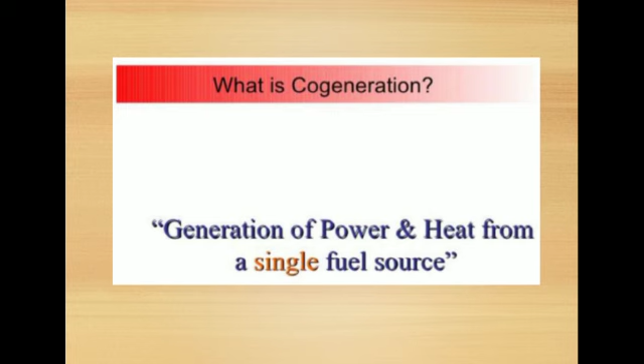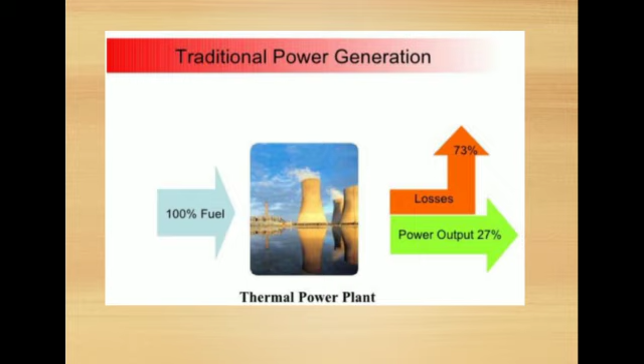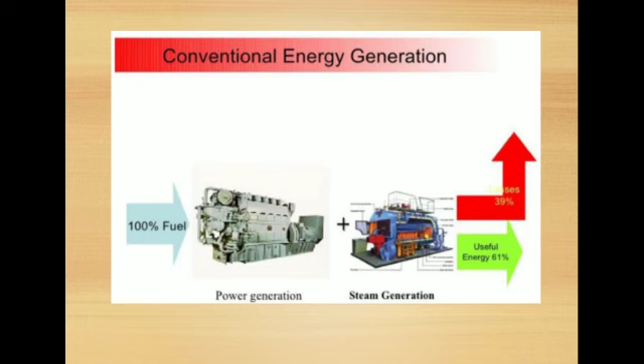Here is an example where 100% of fuel is burned. You can get the power output and some of the losses. Some losses are defined: flue gas losses, power output. The overall efficiency is greater than 75%. Captive power at low cost, fuel saving, and quality power at all times.

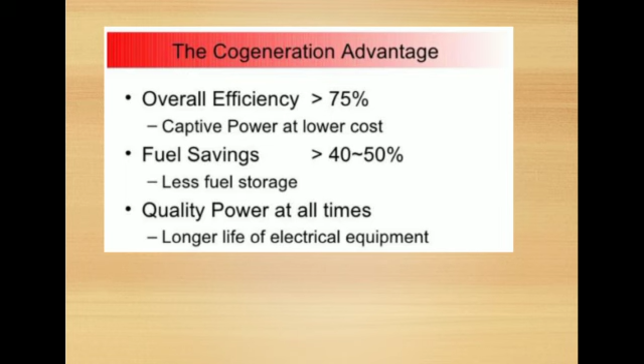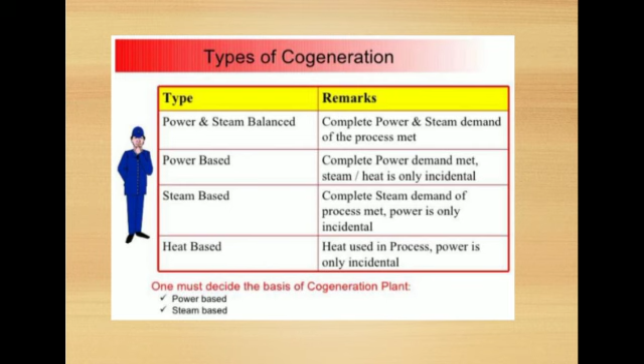Types of cogeneration. Here the power and steam balance is based on power based and steam based, heat based. One must decide the basis of the cogeneration plant, power based or steam based. Cogeneration is combined heat and power, called CHP: sequential generation of two different forms of useful energy using a single primary energy source. Most usual are electrical or mechanical, and thermal, heating or cooling.

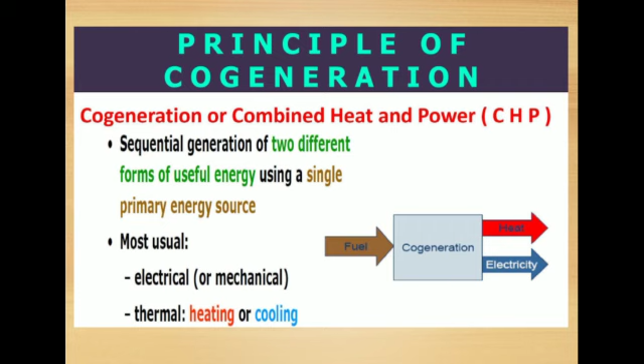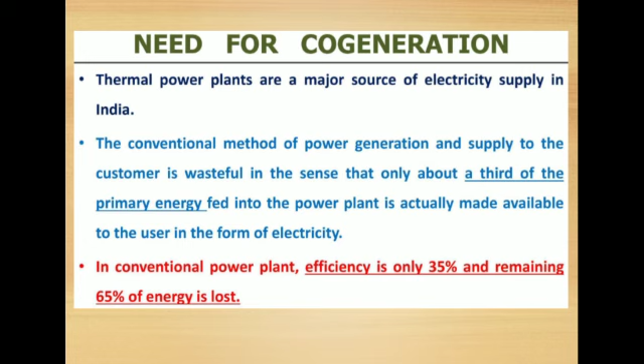Why is cogeneration needed? Thermal power plants are the major source of electricity supplied in India. The conventional method of power generation and supply to the customer is wasteful in the sense that only about a third of the primary energy fed into the power plant is actually made available to the user in the form of electricity. The conventional power plant efficiency is only 35% and the remaining 65% of energy is lost.

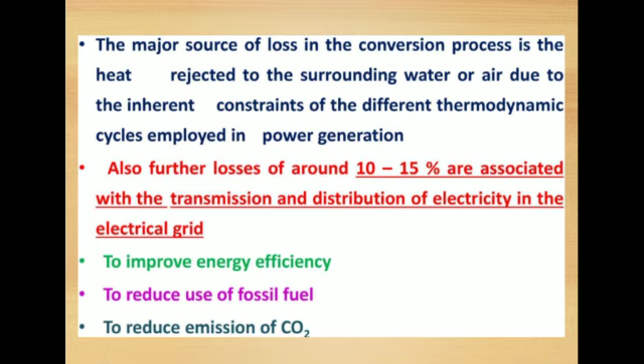Another major source of loss in the conversion process is the heat rejected to the surrounding water or air due to the inherent constraints of the different thermodynamic cycles employed in power generation. Cogeneration is used to improve energy efficiency and also reduce the use of fossil fuel. Another one is to reduce the emission of carbon dioxide.

Cogeneration system cycle. There are two types of cogeneration system cycle: first, topping cycle, second, bottoming cycle. A cogeneration system can be classified as either a topping or a bottoming cycle on the basis of the sequence of energy use. In the topping cycle, the fuel supplied is used to first produce power and then thermal energy, which is a byproduct of the cycle and is used to satisfy process heat or other thermal requirements.

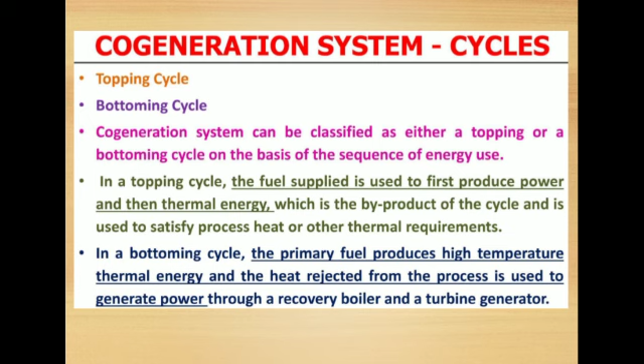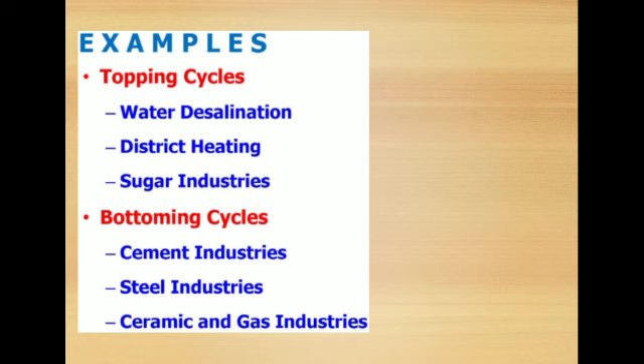In the bottoming cycle, the primary fuel produces high temperature thermal energy and the heat rejected from the process is used to generate power through a recovery boiler and a turbine generator. Examples of topping cycle: water desalination, district heating, and sugar industries. Next, bottoming cycle examples: cement industries, steel industries, ceramic and gas industries.

Types of topping cycle. A gas turbine or diesel engine producing electrical or mechanical power followed by a heat recovery boiler to create steam to drive a secondary steam turbine. This is called a combined cycle topping system. The second type of system burns fuel to produce high pressure steam that then passes through a steam turbine to produce power, with the exhaust providing low pressure process steam. This is a steam turbine topping system.

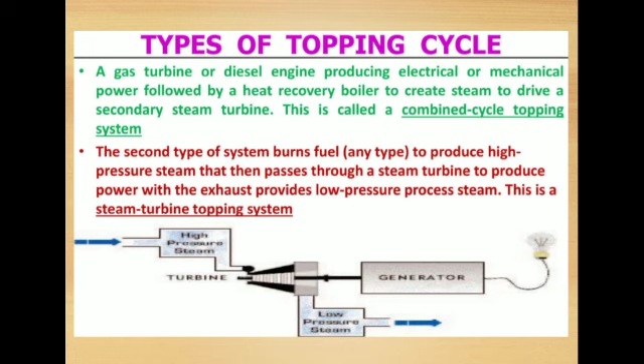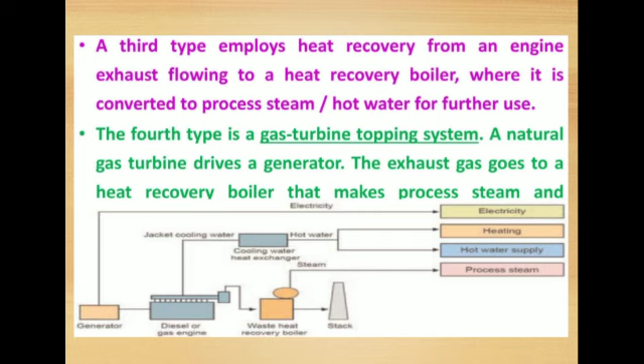The third type employs heat recovery from an engine exhaust flowing to a heat recovery boiler where it is converted to process steam or hot water for further use. The fourth type is a gas turbine topping system. A natural gas turbine drives a generator. The exhaust gas goes to the heat recovery boiler that makes process steam.

Bottoming cycle. Bottoming cycles are suitable for manufacturing processes that require heat at high temperature in furnaces and kilns and reject heat at significantly high temperature. Another important point is that bottoming cycle plants are much less common than topping cycle plants.

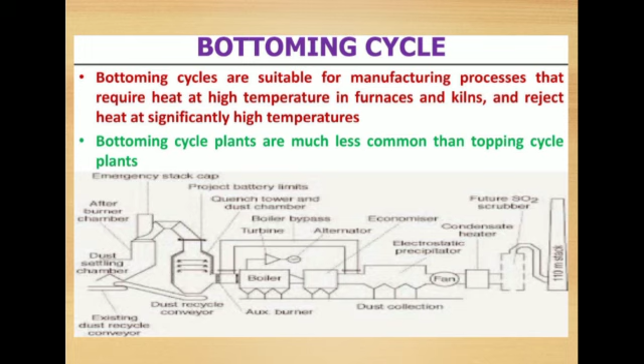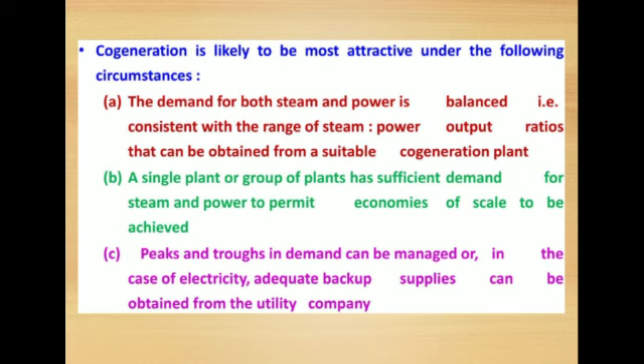Cogeneration is likely to be most attractive under the following circumstances. The demand for both steam and power is balanced, that is, consistent with the range of steam to power output ratio that can be obtained from a suitable cogeneration plant. Second, a single plant or group of plants has sufficient demand for steam and power to permit economies of scale to be achieved. Peaks and troughs in demand can be managed, or in the case of electricity, adequate backup supplies can be obtained from the utility company.